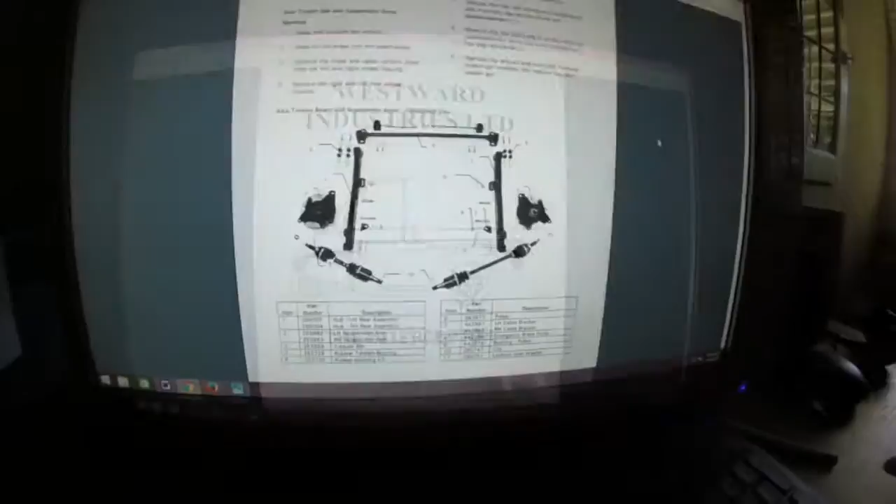Here it is, the online manual for the BT57, which is the 1994 to 2001 Go4 interceptors. This is the manual that's on the Silly Little Cars website, and the section I need for the suspension work I'm going to be doing is section 6, page 20. Let's go check it out. Here it is, section 6, page 20. This is the exploded view parts for the rear suspension work.

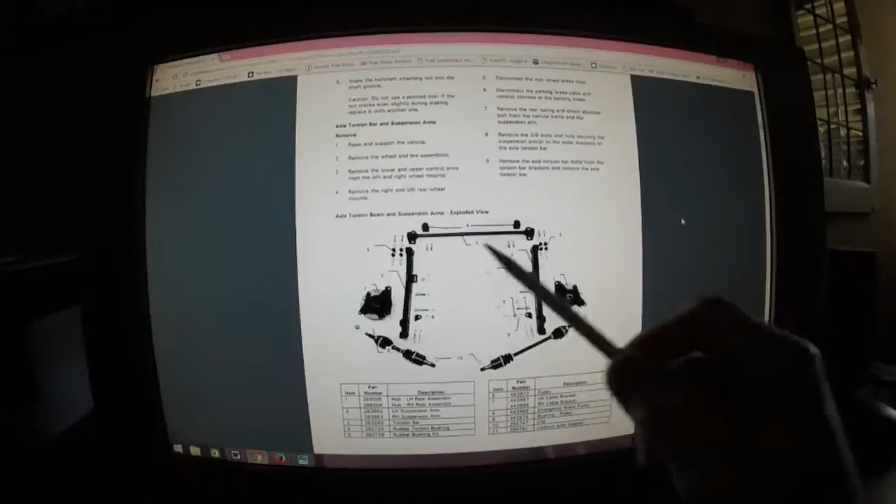What I'm going to be doing today is showing you how to replace these 4 bushings that are on either side of the car. And this is the actual torsion bar. It's connected with these rubber bushings to the front frame. This is the front of the vehicle. This is the rear. They actually have the 9-step instructions on how to do it, but no way I'm doing it that way. It's way too much work.

That's why Canada is not in the automotive industry, I'm pretty sure.

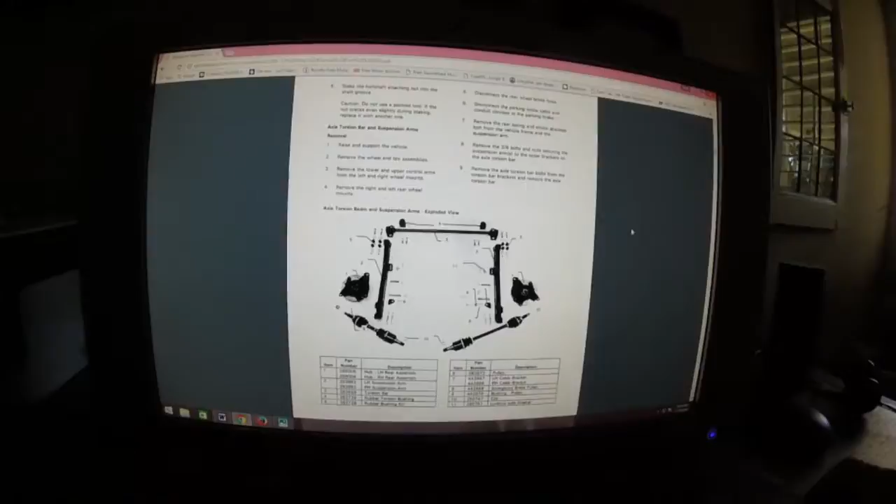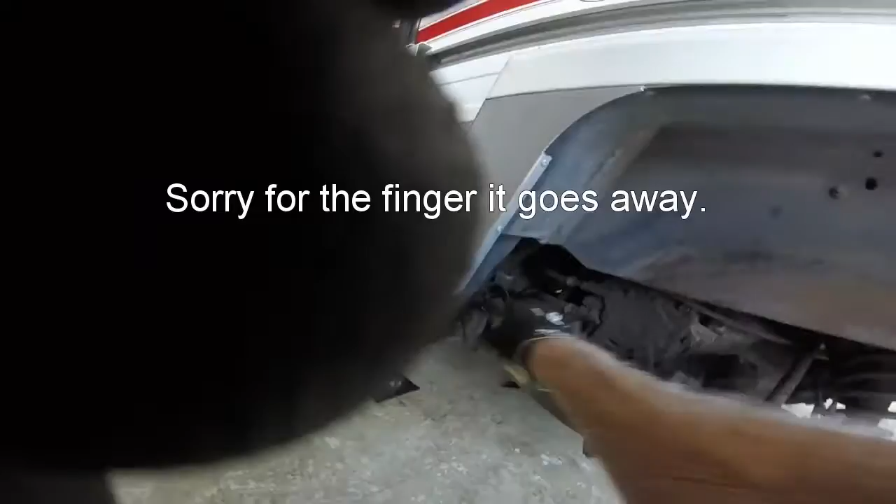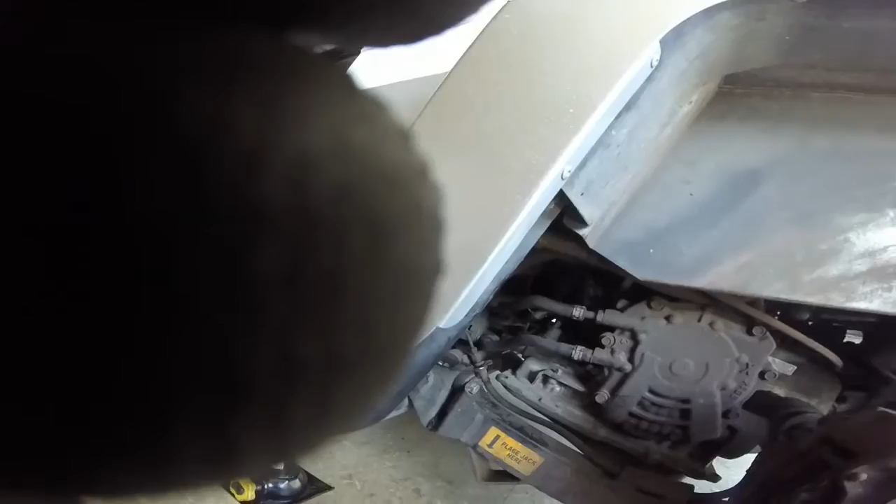I will be showing you how to do it a lot simpler and quicker, hopefully. So this is it. Let's go out and get to work. Alright, here we are. Already jacked it up and removed the wheel so you have more access. It'd be nice to leave the wheel on, just keeps it nice and level. But what I've done is I've supported the suspension arm just so it doesn't drop too much, and the front rail cab, because you have to keep it kind of somewhat level. You don't want these bolts pinching.

You can see these are the bolts I'm going to be replacing. This is a 2001 Go4, which is the BT57 models with the torsion bar suspension. And as you can see, this thing only had 22,000 miles on it when I got it 5 months ago. And I'm surprised at how much wear there is on some of these rubbers. It was from the coast area up in Northern California. Maybe it had something to do with it. These are the new ones I put on a couple weeks ago, so you can see the difference.

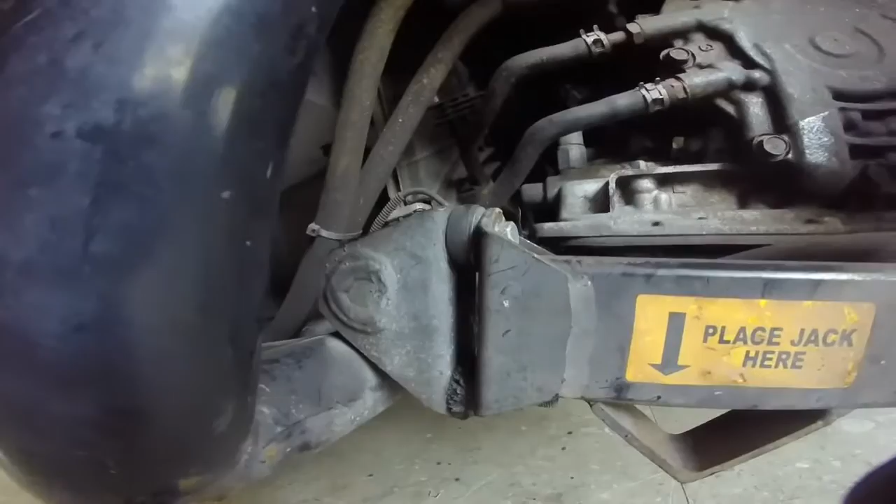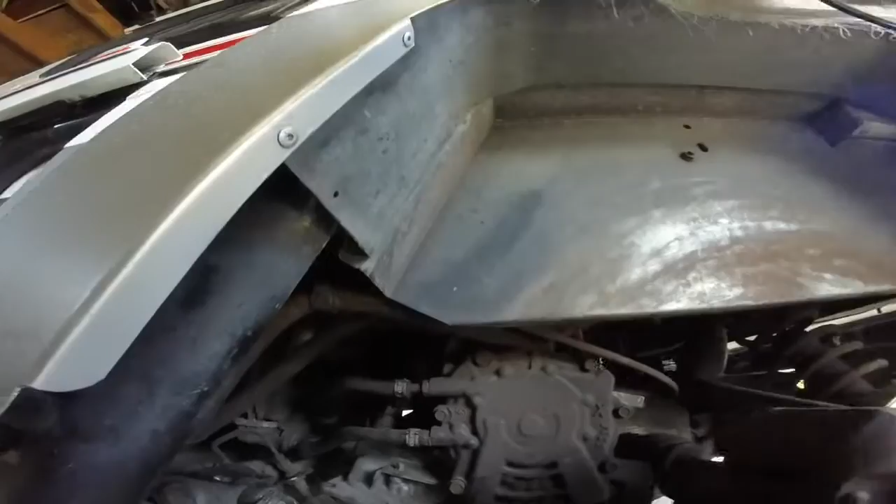And the torsion bar, you can see it runs all the way across from one side to the other. But the only other thing you can see here is the motor mount right there, that round thing. I don't know if it's light enough right here. Between the motor mount and these torsion bar bolts, it's the only thing that really keeps the rear and the front bolted together. I mean, there's a few hoses and radiator stuff, but other than that, it's all suspension.

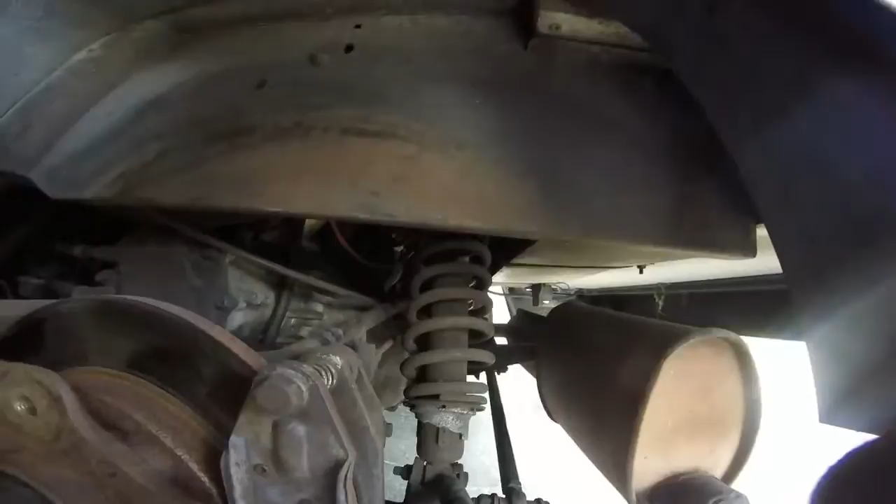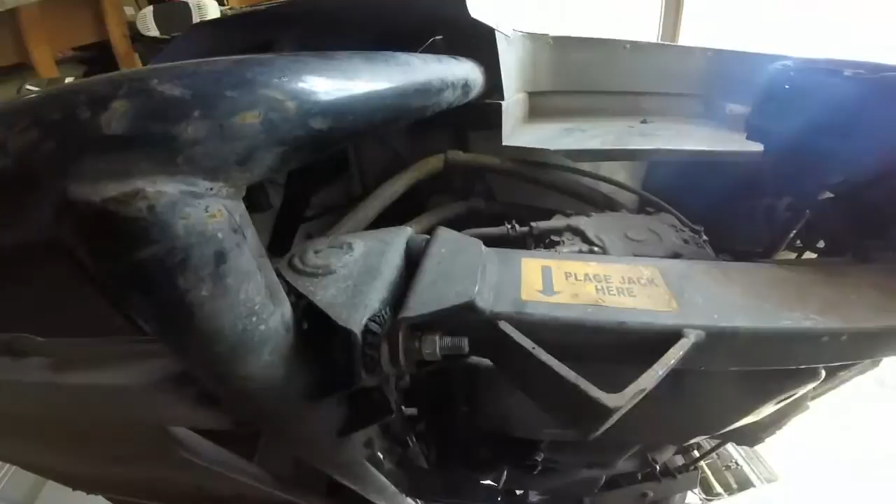So anyway, I'm going to remove these bolts, and I'll show you why I'm going to cut them off. According to the manual, you're supposed to remove control arms, lower shock from the suspension arm, and the wheel assembly, I guess, just to keep the weight. So they want you to pull this whole thing back so you can get these bolts out, but I'm not going to do that. I'm going to cut that bolt, and I'll show you it'll be a lot easier, a lot less work. Still work, not as much work.

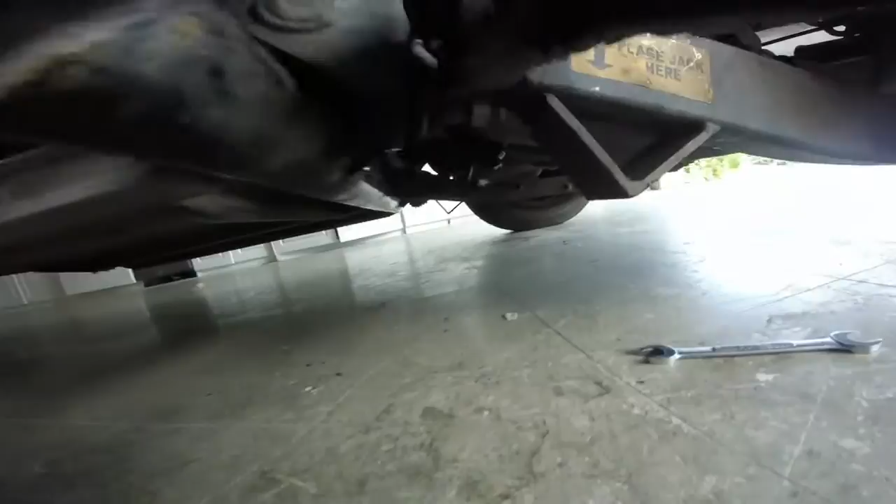You just got to get this bolt so it will slide freely back and forth. And once you do that, you still got to get the spacing right here to get the new bushing in, because that's a lot smaller, narrower, because it's so compressed, the bigger one. So we need to increase that space, and that gets to be the tricky part, because you got to make adjustments with your jack. So I'm going to get these bolts undone, and then I'll show you why they have to be cut out.

I got this one loosened up enough. You see, you can't get the bolt out because it hits the frame. So it's not going one way or the other. The only way to get these bushings out is to get the bolt all the way out, and that ain't happening. So that's why we are going to cut the bolt so we can get all this out, and then put in a new bolt and bushings.

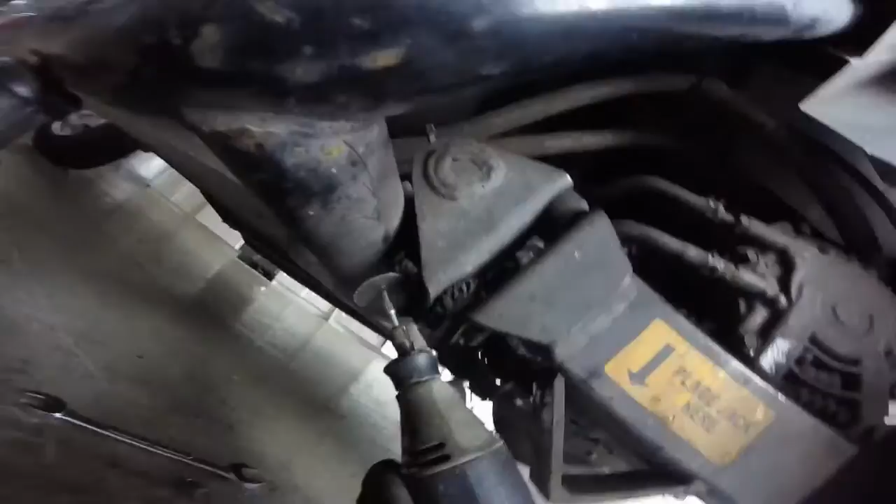Well, this is the tool I'm going to use to cut it. Gets in there just good enough, so give me a few seconds here and I'm going to go ahead and cut that. Sparks are going to be flying, so hopefully we'll get it without breaking this bit. I got others. Okay, I got the bolt cut, and then one of the bushings out.

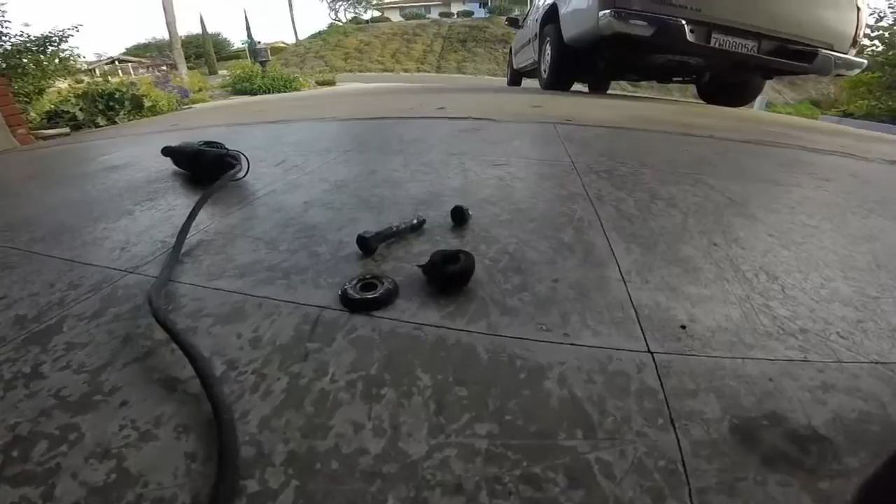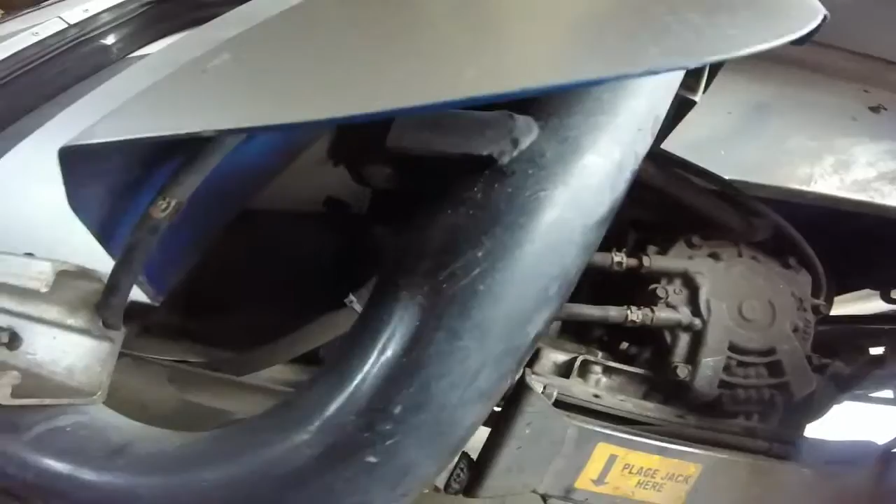Bolt's cut, one of the bushings, but what I'm going to do now is, before I take that bushing out, I'm going to knock in some wedge in here so it doesn't collapse on me. That's a little too big, so this is just some funky molding I got. So I'm just going to pound those in to keep the separation. Okay, with the wedge in there, I was able to pull out the bushing. Oop. So able to get the wedge in.

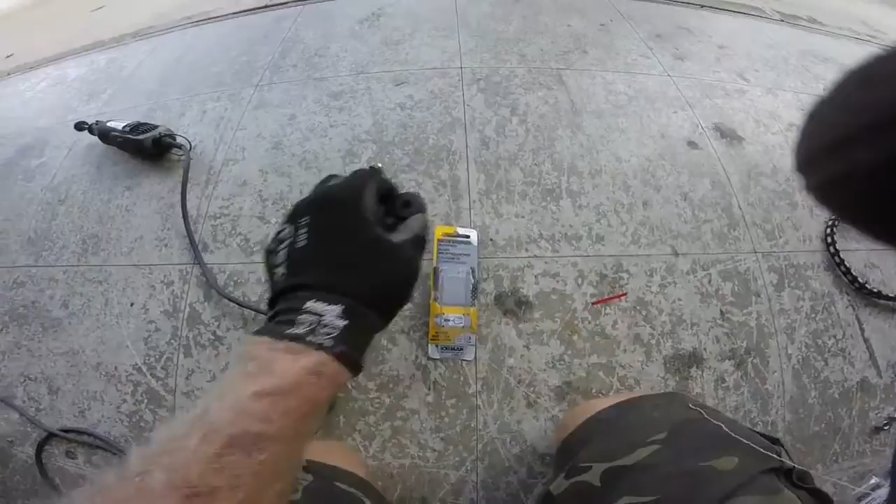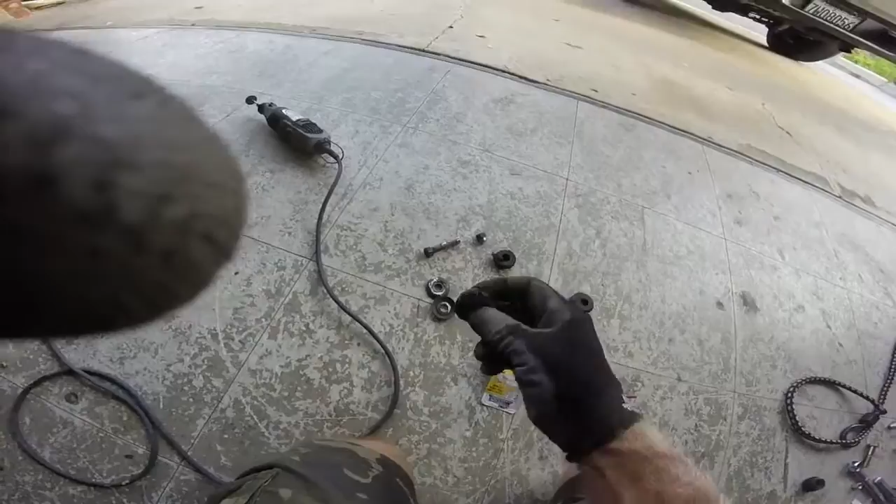So I might have to make a little bit of adjustments to get the thicker bushing in, but we'll deal with that in a minute. Okay, got the old bushings out. Definitely trashed. Actually, this is the one that looked real thin, and when you get it out of there, once it gets decompressed, it doesn't look bad, but boy, you could tell by the way it looked before it was bad, and plus it's lost all of its stiffness.

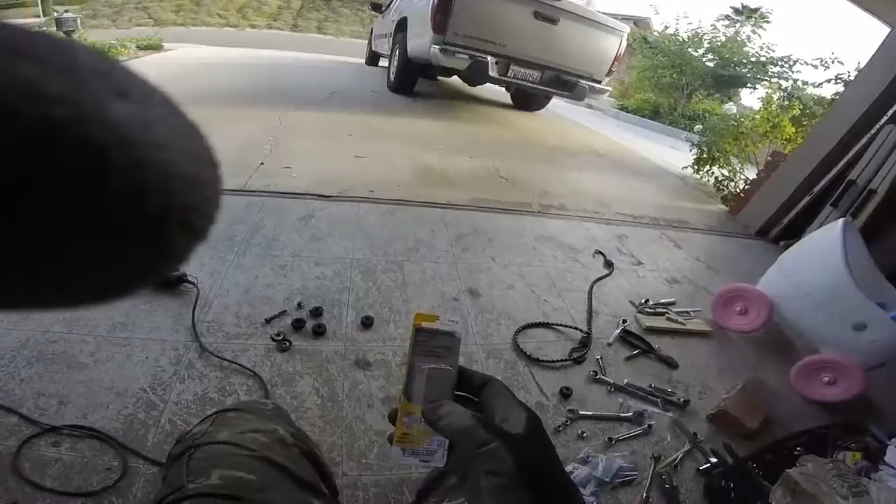These are the ones I'm replacing it with. I got them off the shelf at Pep Boys, I think, but I think O'Reilly has them, any auto parts store. These are just shock absorber bushings, a standard. You know, they have this little bump on them, and actually the old ones did too, so it's just your basic shock bushing. I guess any of them will do.

I'm assuming that goes in there like that, so that's why I did the other ones. I kind of thought maybe this little notch went into this bigger hole here, but it really doesn't, because the hole's not big on both sides, the diameter is different, so I just put it in any way I can. So, all right.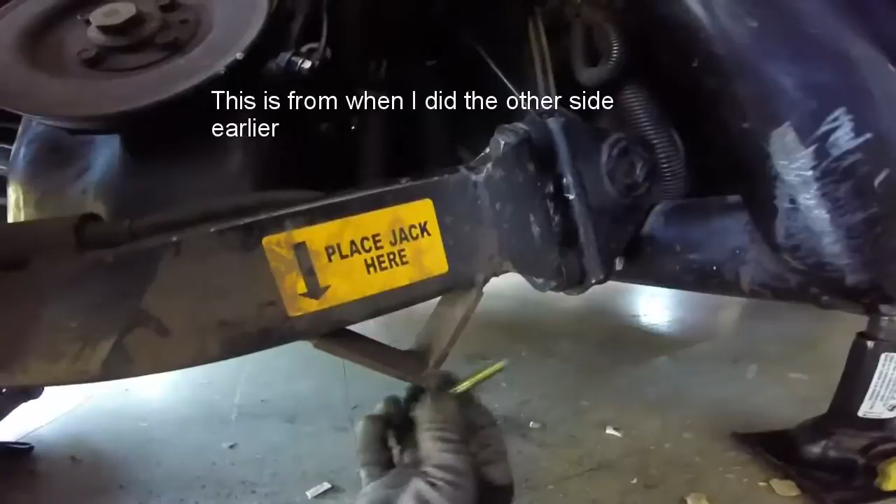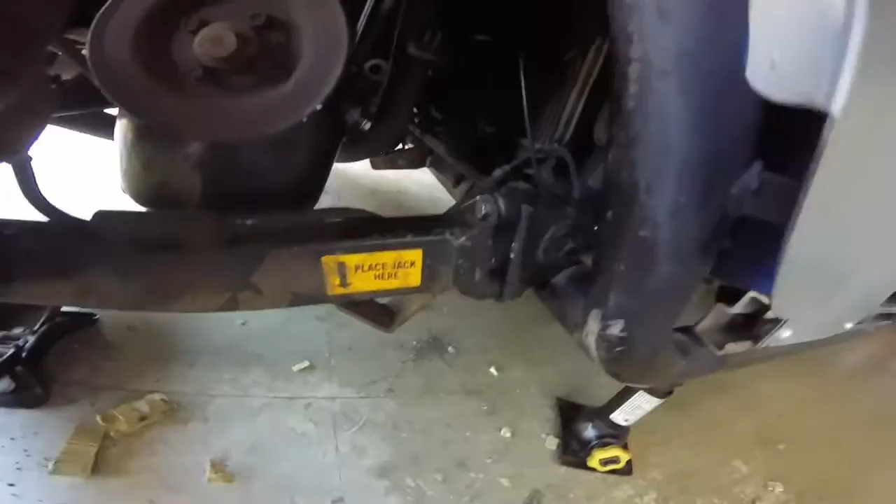Well, there was one thing I forgot to show before. Pretty much got it all installed, but there was one thing I forgot to tell you: when this gets cut, the top bolts weren't a problem. Putting the bottom one in, I guess I should have thought about it a little more, but I can't get the 2.5-inch bolt in because of this or this. So I went to Home Depot and got these 55mm hex bolts that they had.

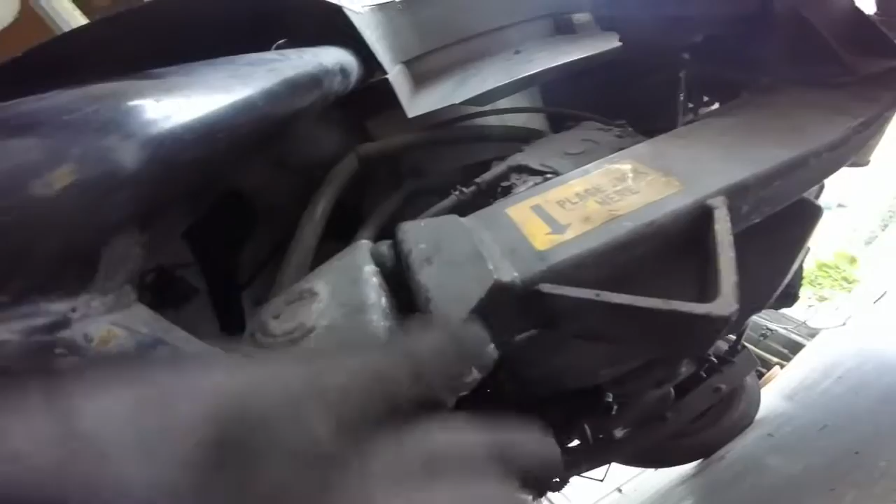I think the quality is just as good, but those are the ones that work. I could actually get it in the back, and 2.5 is too long, 2 inches is too short. Good luck finding a 2 1/4. But this 55mm one, you can get at an auto parts store, Lowe's, or Home Depot. I was able to bring it in from the back side and then bolt it here. Actually took this one apart again and put it in the right way, because I wanted to get a washer in there; they didn't put washers in it. It was kind of sloppy, but that's pretty much it.

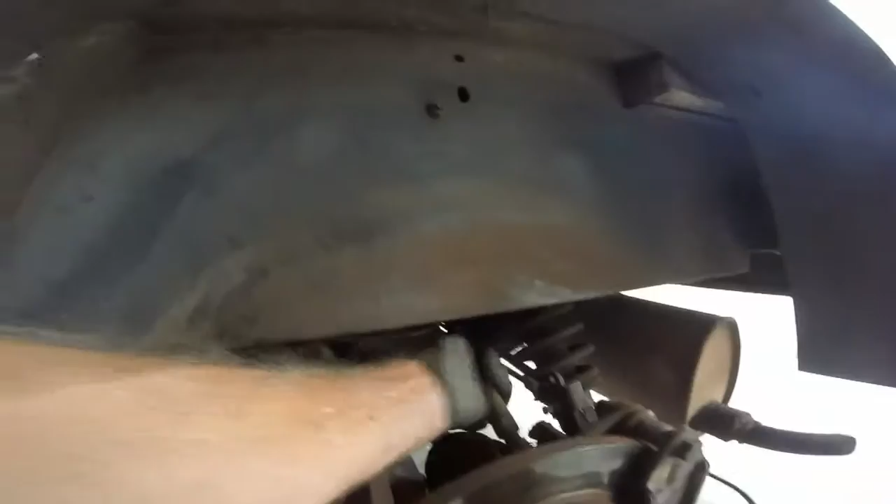I tightened them up. I really don't know how tight to tighten them. I just got to where it looked like there was compression. I'm going to take it for a drive. Looks pretty nice and straight here. I don't see any tweaking. I don't think I'm going to have to adjust my upper or lower control arms. I'll see what happens when I get the wheel on, see if I have any toe or camber. If I do, then I'll just turn my upper or lower control arms to level out the tire.

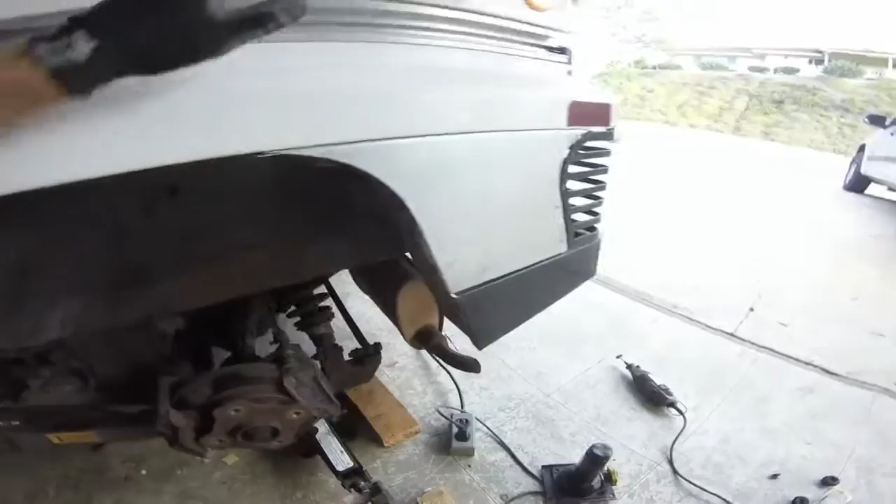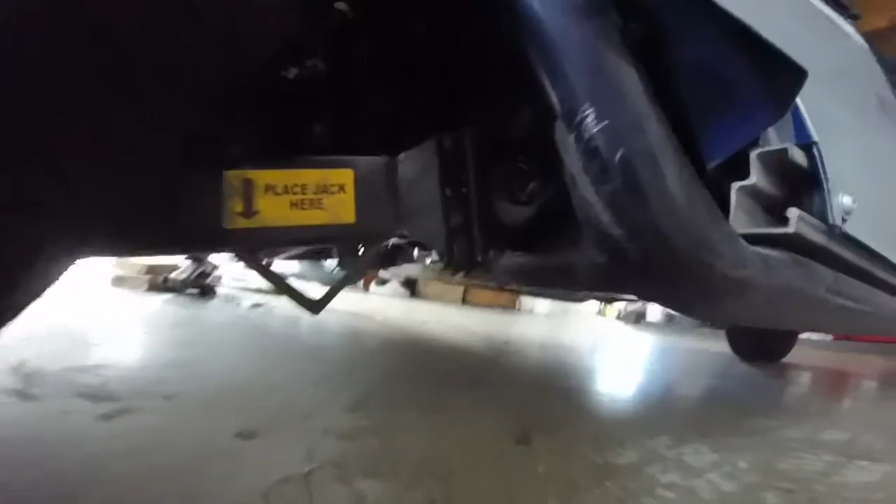I think the other one looked pretty good yesterday when I did it. I got the tire looking pretty good without too much camber in it. So I'm going to take it for a ride. The ones I did yesterday still look pretty good. See, I just got some compression in there. And then I'll just keep tightening them, checking them, and tightening them. I'd like to put another bolt on these just to have a locking bolt.

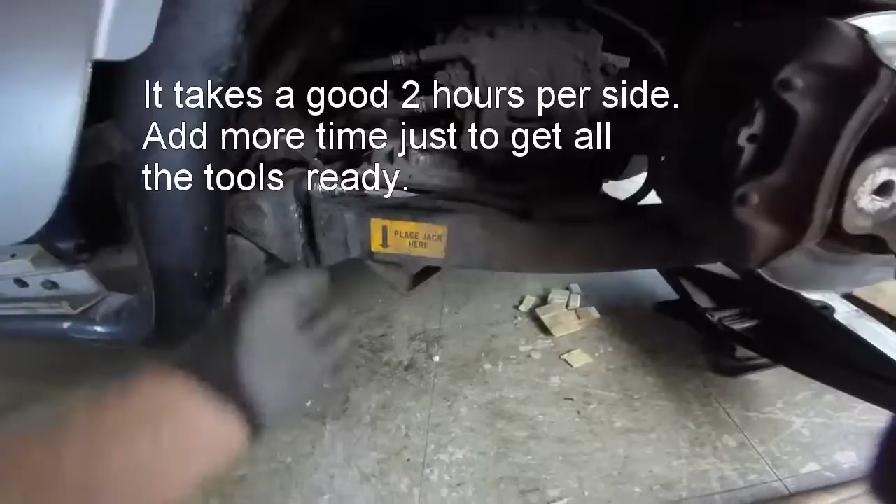Okay, well I think that's pretty much it. I'll put the tire back on, take it for a ride, and I'll let you know how it works, but I know it's going to work great. It's not an easy project, but it's definitely doable. Took me an hour and 40 minutes to do this one, and definitely the hardest part is just keeping these holes aligned and keeping the spacing, so you can get the new bushing in, and you do that by adjusting the heights. I took this one off because you can raise and lower the control arm, and you got to keep it straight. That's really the only tricky part, but it's definitely doable.

I'm going to go for a test drive, and I'll let you know how it rides. Take it over some bumps. This thing always drove like a mini tank. I felt every bump, jarring. You can feel bumps, but they're smooth bumps now. I actually feel my front shocks bouncing, and they've never bounced before. In fact, I was concerned at one time that they were even operating. I made a video of them just to see if they were moving up and down. This thing rode so hard, I thought I was riding with no shocks at all.

But the whole suspension now feels, I can feel the rear shocks working. Bumps that I've gone over before that sounded almost metal on metal are nice and cushiony. I went from a tank to driving like a regular car. These things, they are what they are. They're never smooth, but I can definitely feel the difference. I've never felt this smooth bounce before. Before everything was jarring, and now, boy, that's nice. Woo!